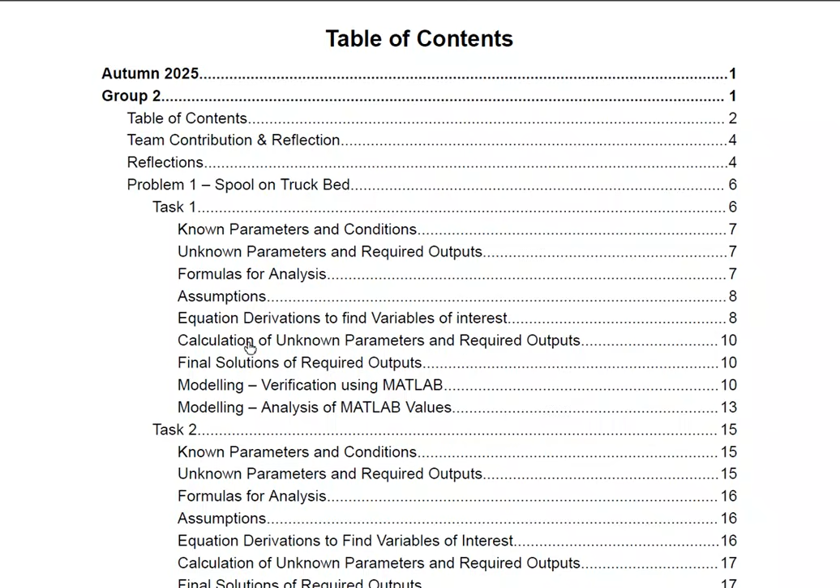We go to the table of contents on the second page. What we have there, and the problem against the page. So we can simply click on that and go to the work. Now, one of the most important things we need to have is on the first page, about the team contribution and the reflection. Who did what? So we can tell that your work is better than your colleague's.

So just saying here that Christina did problem 2 and the MATLAB Virtual Lab 2, while Kaja did problem 1 and the MATLAB Virtual Lab 1. The reflection is about what the student got as an impression from the project. I like what they've done here. They put as sections the achievements from the project, what worked, what didn't work, what you would change if given another opportunity to do the task.

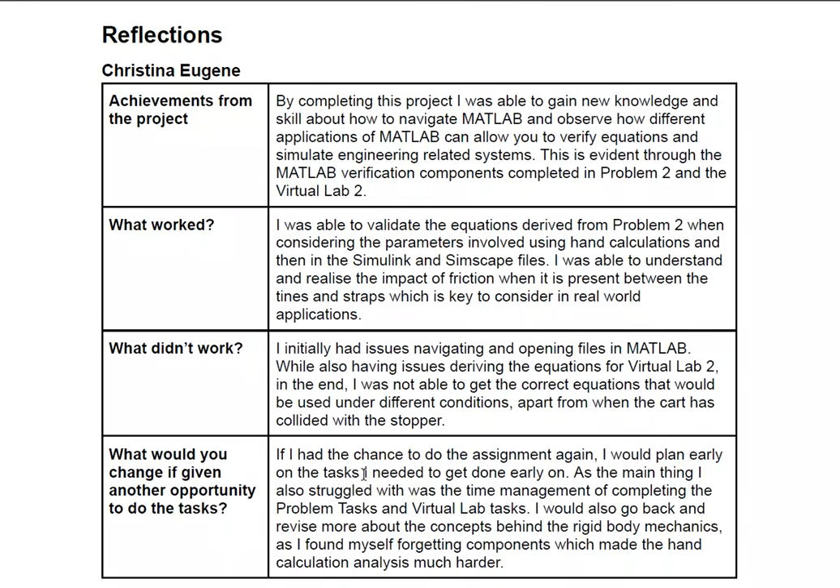Okay, so, wait a second. Forgetting some components, which made the hand calculation analysis much harder. Well, yeah, we explained that. So if you just watch the video, you'll understand what we need from you. Kaja did the same thing here for his reflection, or the impression of the project.

Now we go to the first section, which is about problem number 1, the same thing that we had this year. It's about the spool on the truck bed. You know that you will need to explain to the reader what you're intending to do here, what the reader is going to go through. You will find in the second example we have today that the student just wrote down something like 3 lines describing the problem. It's not acceptable. You need to do something professional.

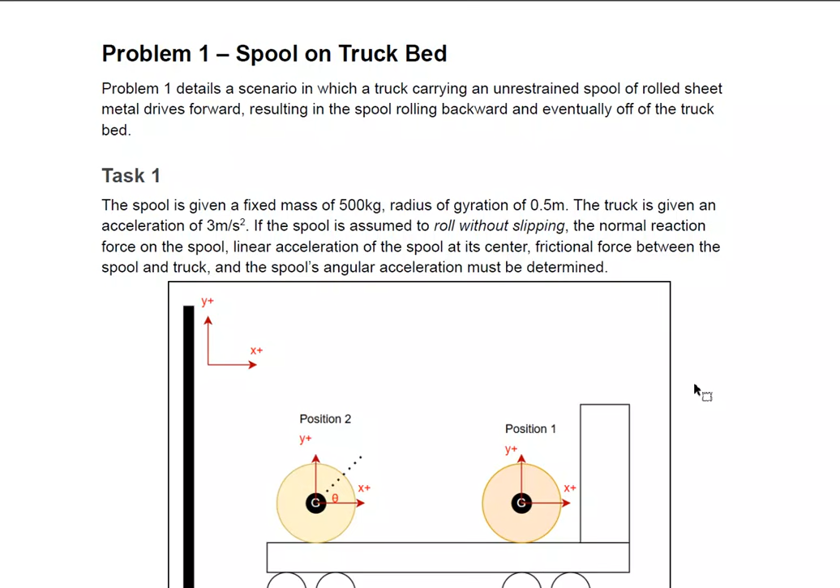So here, I think it was Kaja. He explained what the problem is. 500 kilograms for the mass, the radius of gyration given. The truck has an acceleration. The spool is assumed to roll without slipping in the first scenario. Normal reaction forces on the spool, linear acceleration of the spool at its center, frictional force between the spool and the truck, and the spool's angular acceleration must be determined. So he explained what we have been given and what we need to get.

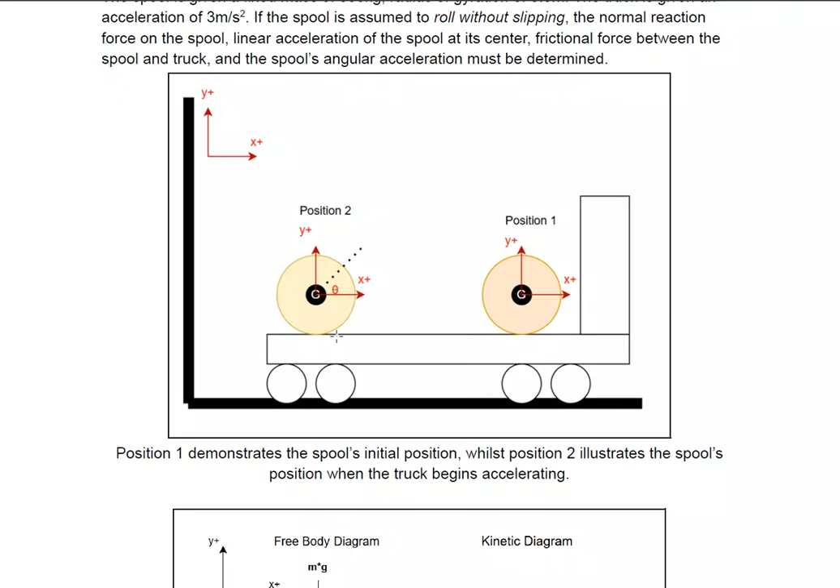I like that because he did the sketch by himself. I have a video somewhere on how to sketch using Excel. Maybe I'll repeat that for you by tomorrow, make a short video on how to sketch using Excel and how to take that to the Word document. So you can see that he sketched that by himself. It's much better than taking a snapshot and putting it in your work. More effort means you deserve more points.

Okay, so that's a free body diagram and the kinetic diagram for this scenario, and we did that in the examples, as you remember. Okay, the known parameters and the conditions have all been displayed as a table: the mass of the spool, the radius of gyration for the spool, the truck acceleration. These are something you can change, so that's what we call parameters. That will be your input, and according to that, you will get some output.

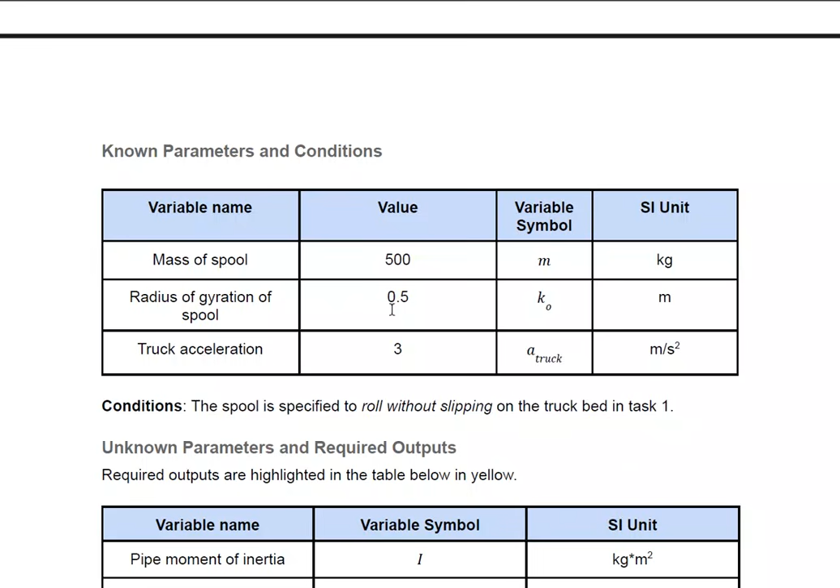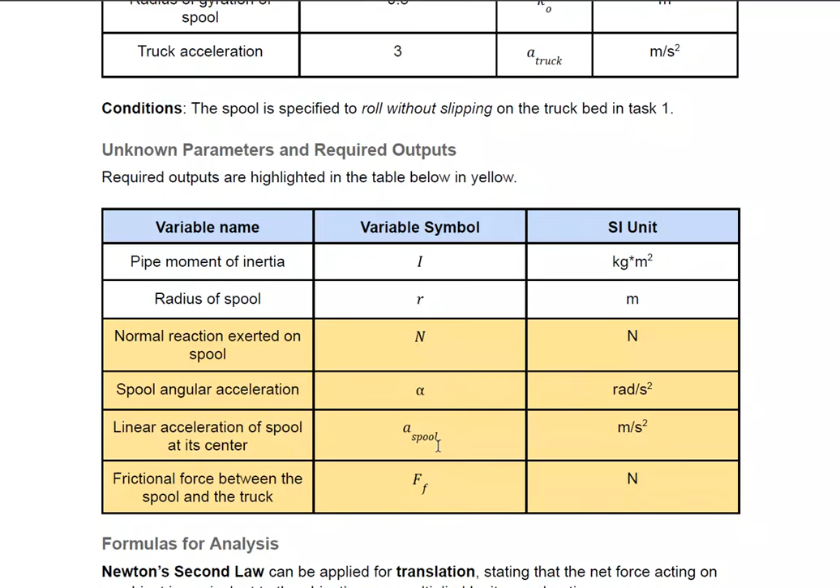The variables we are going to have are also listed. These are the unknown parameters and the required outputs. The variable named mass moment of inertia, because this will be calculated using both the mass and the radius of gyration, so this will be something to be calculated. Radius of the spool in meters, the normal reaction exerted on the spool, the normal force, we have the alpha, we have the linear acceleration of the spool at the center, or the AG as we called it earlier, and the frictional force between the spool and the truck.

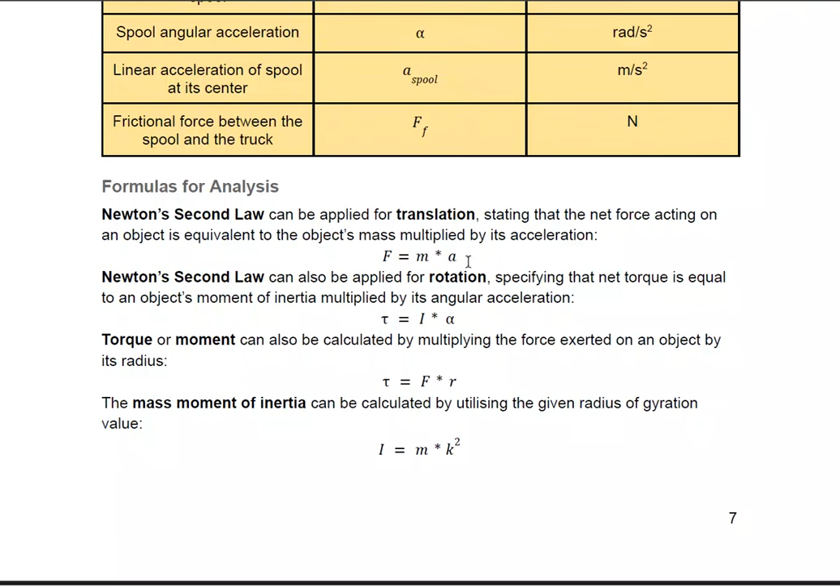So the formulas for analysis, you can get all these formulas from the lecture slide. You can have them from the MATLAB code itself. Just type them. Please don't take a snapshot. Well, it's not that hard to type an equation. It's very easy to type an equation. So please put some effort to do that.

So we come here and put some assumptions for the scenario we have. First, the spool is rolling without slipping in the first scenario. No external forces other than the friction act between the spool and the truck bed at the contact point. The friction is going to be static and sufficient to prevent slipping. The truck has a constant linear acceleration. The spool has a uniform mass distribution, and the acceleration due to gravity is going to be given by 9.81, which is the g value.

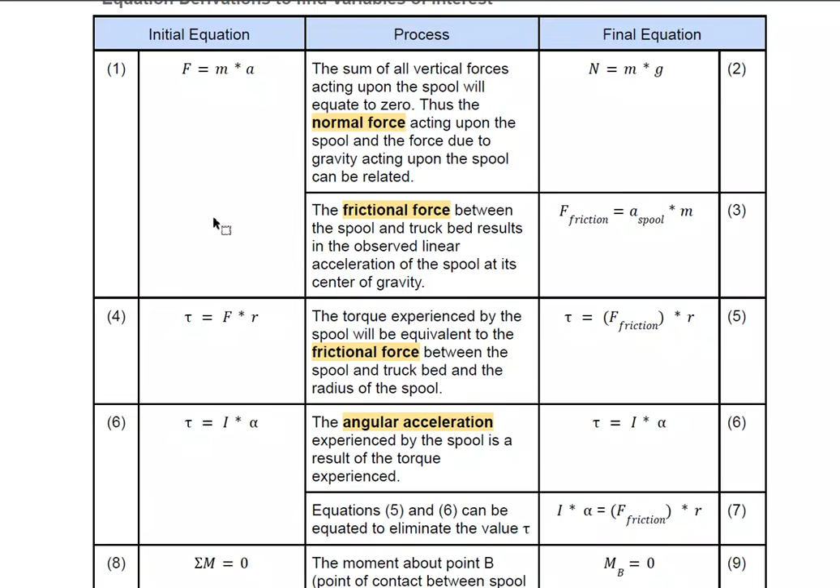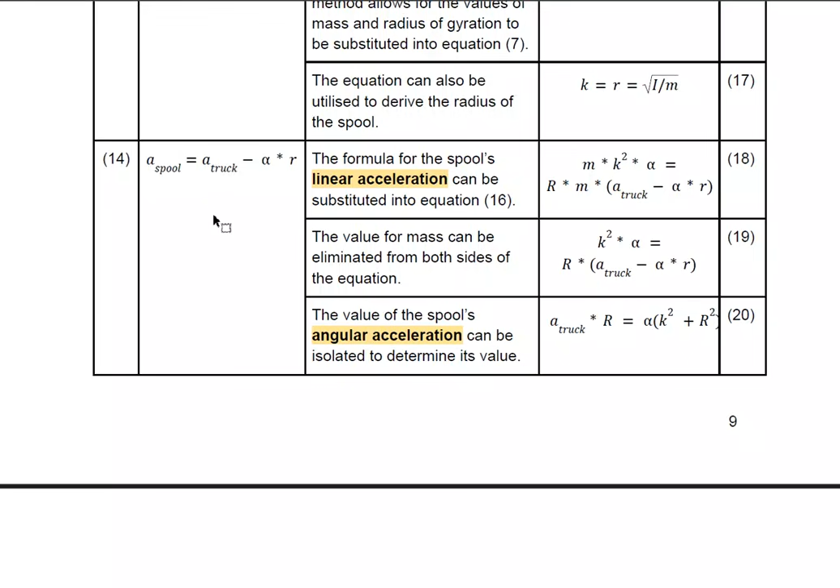The equations for the calculation have been listed. As I told you once again, all these equations are actually coming from the code. Okay, so once again, we did a similar example in the class. We reviewed that for the quiz, so that shouldn't be something new for you. If you would like to know what you are going to add in your report, please watch the video that I have on my playlist.

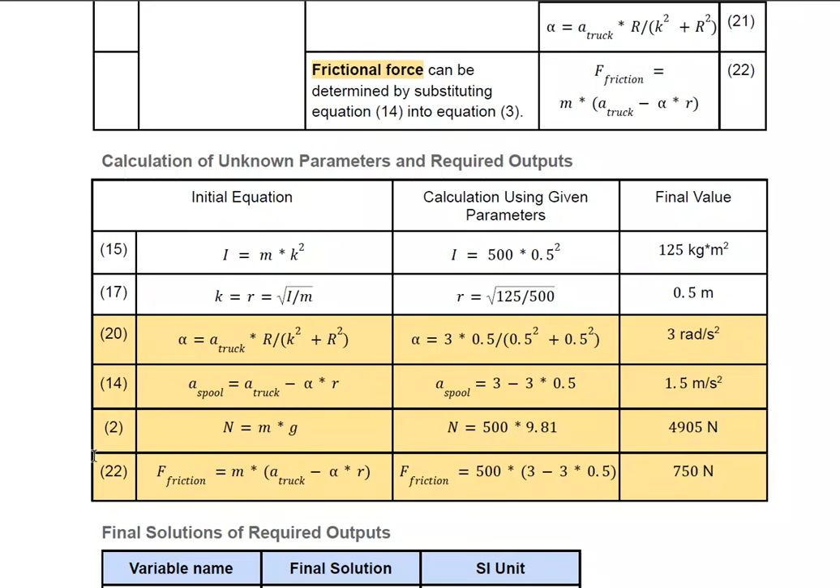The calculation of the unknown parameters and the required outputs: as you know, the I value, the K value, how to be calculated, the alpha, the acceleration of the center of the spool, the normal force, and the friction force. It's a good thing to number the equations, so you can say that this parameter has been calculated using equation number 22.

Okay, the final solution required for the output is going to be the normal reaction exerted on the spool. The normal reaction was 4,905. The spool angular acceleration 3. The linear acceleration of the spool at the center is going to be 1.5 meters per second squared, and the frictional force between the spool and the truck is going to be 750. That has been done by calculation. He put certain values, as you can see here. He decided that the mass is going to be 500, the radius of gyration 0.5, and the acceleration was 3. Then according to that, we calculated the other parameters using the equations given in this list.

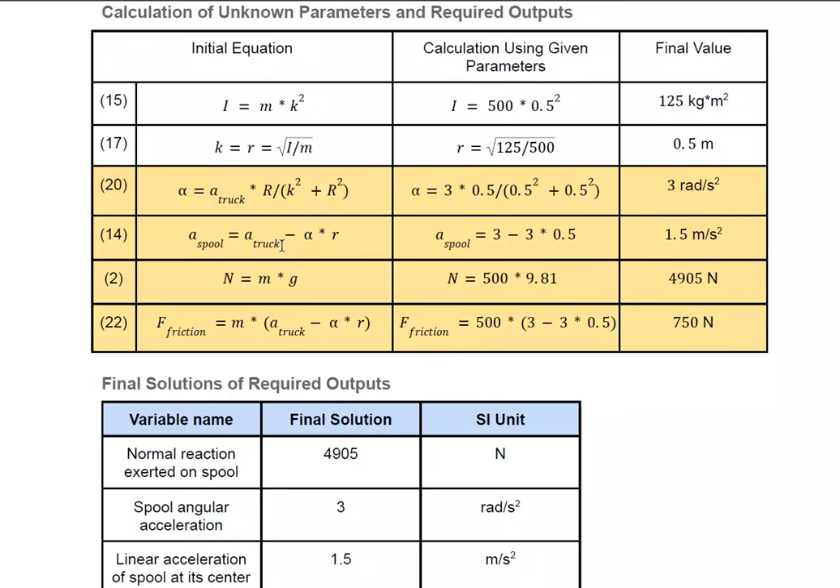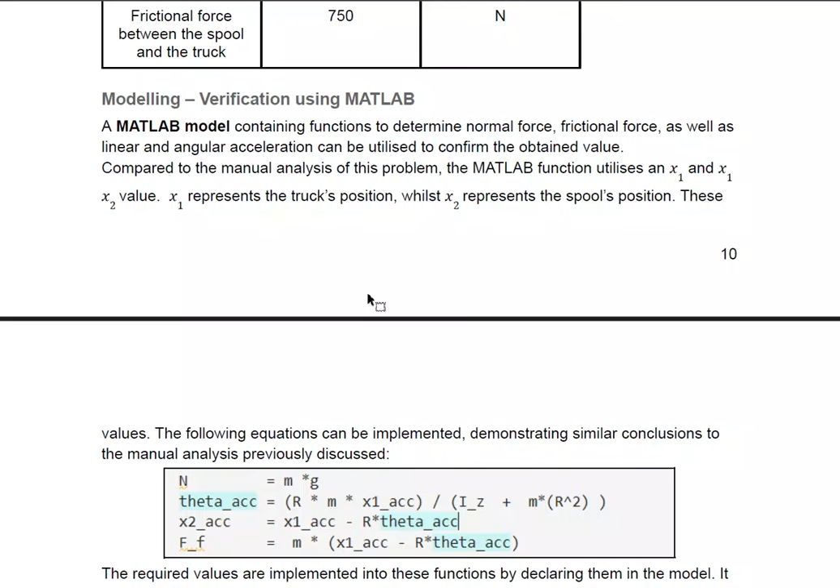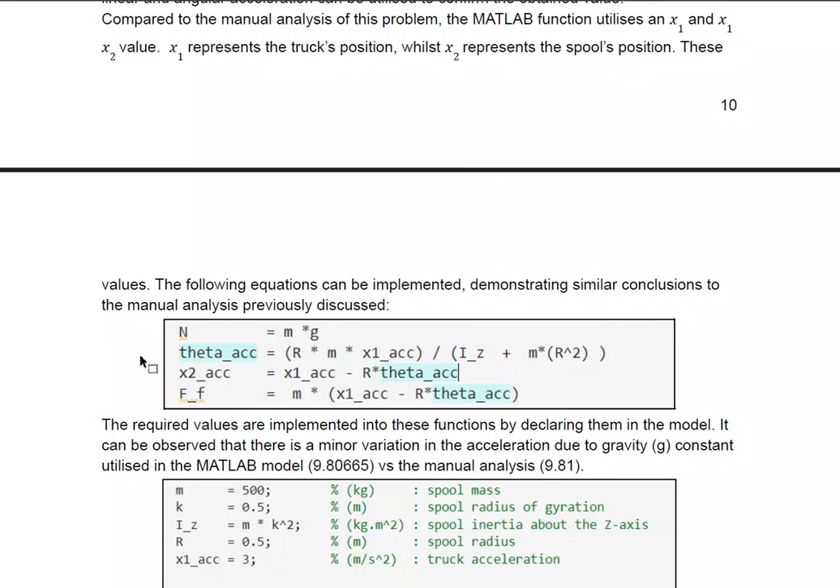Okay, now he's going to use these values to verify the MATLAB is doing the correct calculation. So we run the code. You remember that you have to follow the steps given to you in the start here section, one by one. You have to run every section individually to have the parameters generated for the section after. Don't run the code from the beginning. By doing that, you will end up getting the same values for N, for the friction force, and for the acceleration. That means your code is doing correct work, because you used the hand calculation to verify that the code is working correctly.

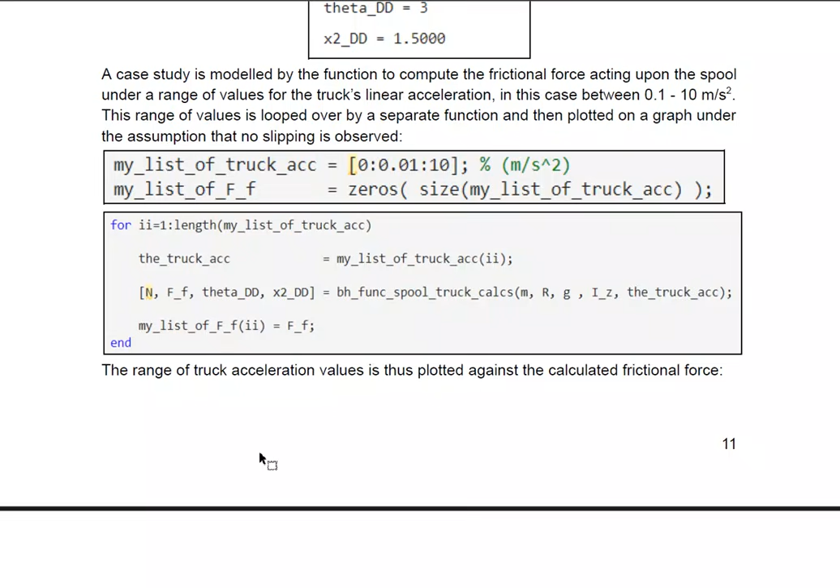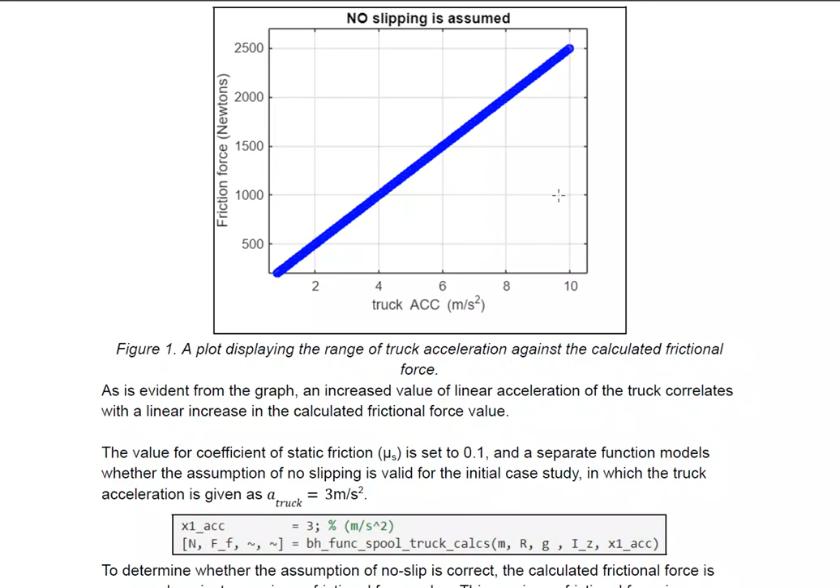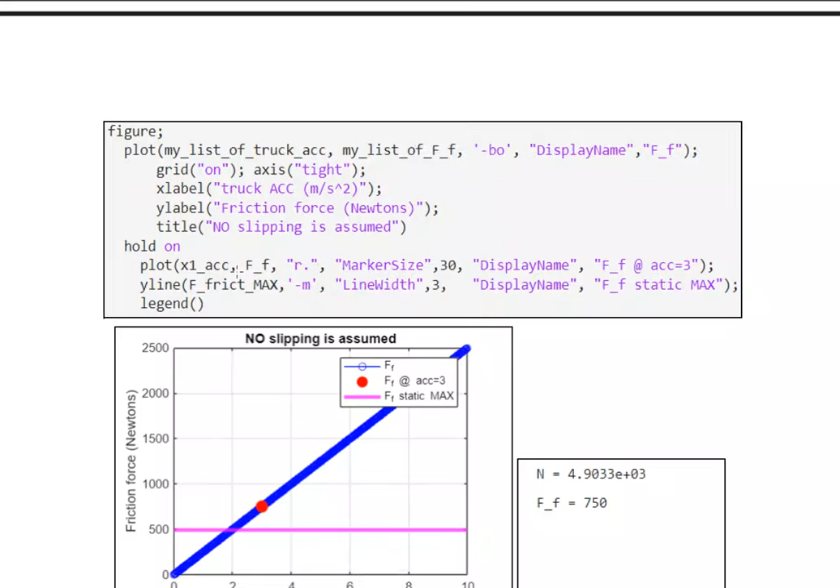Now, after doing that, you can change these values. You can change the inputs and get new values for the normal force, the friction force, the acceleration of the center, and the alpha value, because now you know that the code is working correctly. So watch the video, you will understand what we mean by these graphs and by every output we have here. That was the presentation for the sections, how to plot the figures, the meaning of the figures, what output we are going to get from each figure, and so on. Okay.

From my point of view, I think that many people will say, okay, now he just got that from the code. Yep, but he presented it in a very easy way that makes the reader read it and follow it up in a good manner. So try to do the same thing.

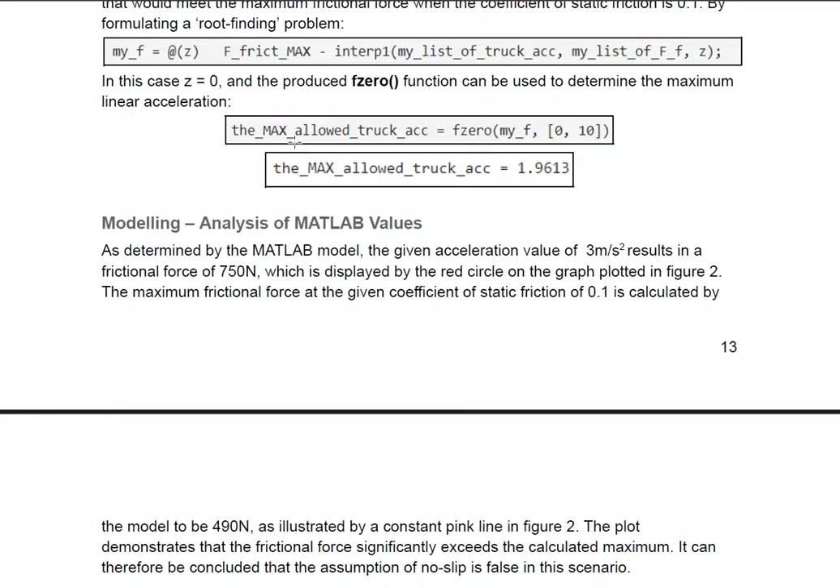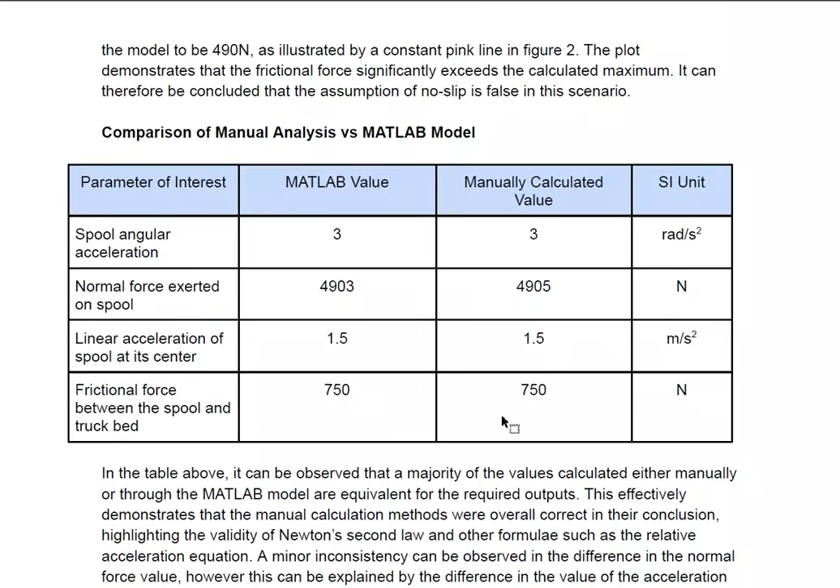Now, modeling analysis of the MATLAB values. He described the MATLAB code first. Now he's going to do the comparison. So for angular acceleration, the MATLAB value is 3, the manual calculation was 3, the same thing with the calculation and the MATLAB value, very small changes, two in thousandths, okay, and the linear acceleration the same, and the frictional force was the same. So just a very brief discussion about what we have between both, and this should be okay.

That was one thing, but I think that he missed something to be done after that. We are going to start with the same parameters. We can change the mass, we can change the acceleration, we can change the radius of gyration. So do that and get multiple results. Let's say, for example, get 3 or 4 sets and make a comparison between them. Okay, you need to add that here.

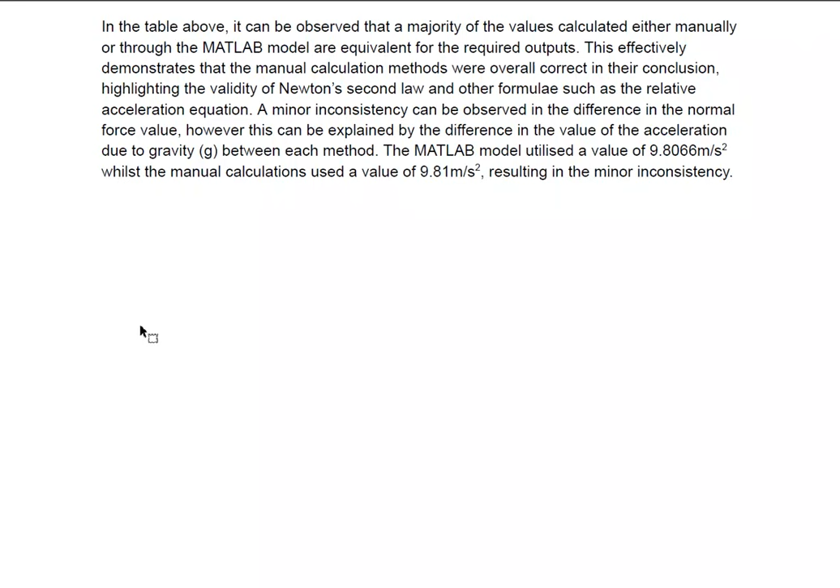So once again, I wasn't the person who marked this one. If I got to mark this one, I think for this section, out of 20, this student deserves about 15. Okay, it's not 18 or 19, it's 15 for what he's done, because he missed the most important thing. If I have a code, I need to use that code to get multiple iterations. No iteration has been done here. Just remember that. No iterations have been done here.

Now we're going to task number 2, where we're going to have the slipping. So, well, actually, not the MATLAB itself, the Simulink will tell you whether you have slipping or no slipping. If you check the video, you will find that the Simulink code has a circle that turns red if there is slipping, green if there is no slipping. That means you need to change your parameters to check in what situation, between a mass of 50 to 500, radius of gyration between 0.1 to 0.5, and truck acceleration between 0.5 to 20, slipping will occur. Not only changing the coefficient of friction.

Usually what we do is fix most of the parameters and change one of them. So I can change the mass. Of course, the mass will be related to the coefficient of friction. So you can change the acceleration. You said that at 0.5 acceleration, there will be no slipping. If I increase the acceleration to 10, there will be slipping.

Then in between them, you're going to have something like another 4 values, and see whether at 2 there will be slipping or no slipping. At 4 or 5 there will be no slipping. At 7.5 we're going to have slipping. So just go back a little bit to 6.8, for example, and see if there is slipping or not. Then you will say that the critical acceleration is going to be this value. That's a good idea, to make the variables change. I'm 100% sure that the student hadn't done that as well.

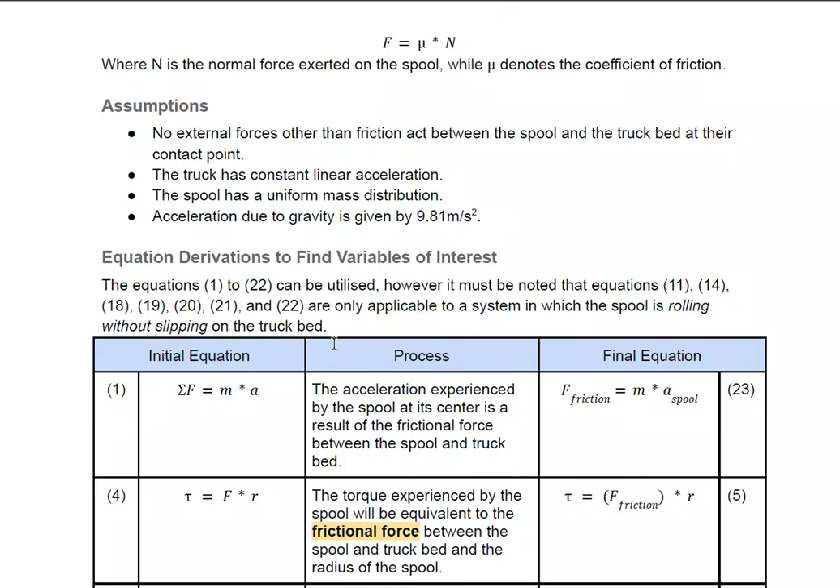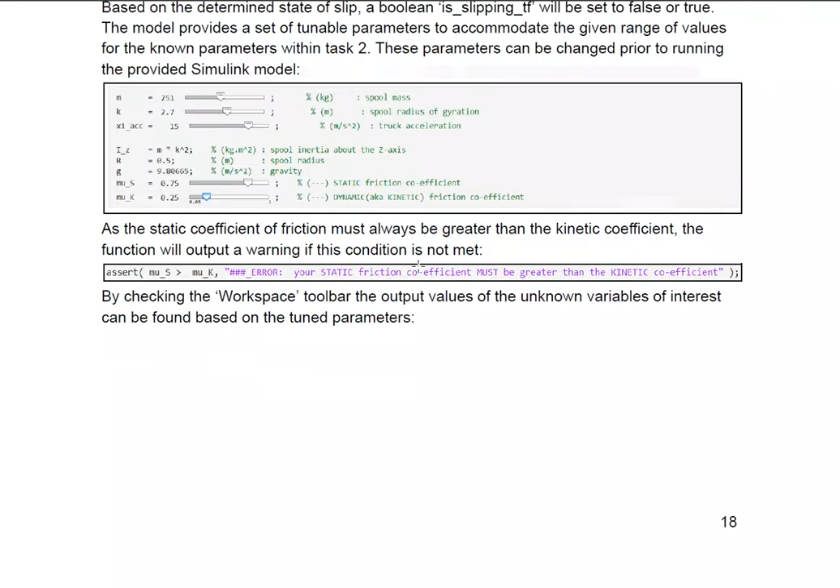So once again, he presented all the equations, which are once again from the code, did the hand calculation for that, and verified the MATLAB code. We can see here that we can slide these sliders. I would like you to watch the video, because I'm not going to explain this one here, to change any of the parameters that we have.

Now, how can you tell that changing the mass won't be enough? Because the mass and the I value, or the moment of inertia, will decide what the K value is. That means you need to calculate the I value for the cylinder, then you will know the radius given to you. Every time you change the mass, you need to change the K value to be compatible with that mass, because these two values are related.

Remember that K is equal to the square root of I divided by the mass. So when the mass changes, the K should be changing. But for the acceleration, if these are constant, and the friction constant is constant, but the acceleration changes, then the situation will be changed. The output will be different.

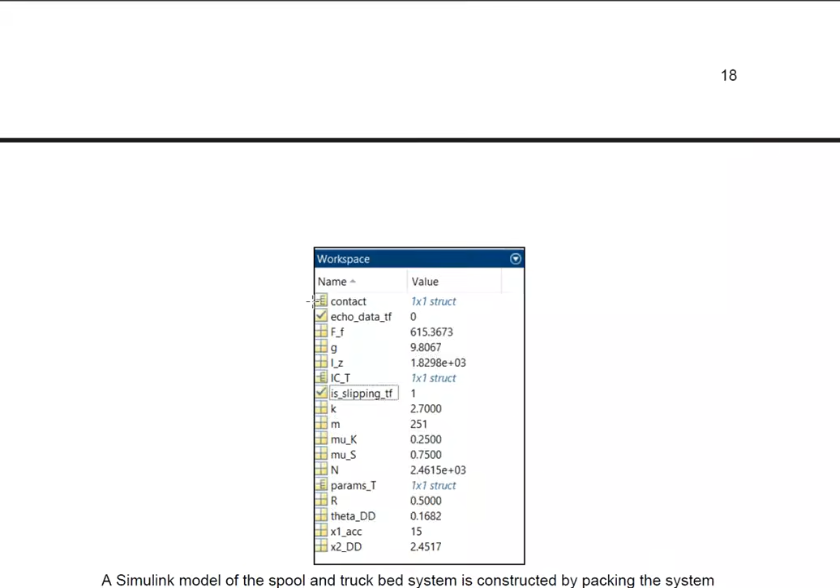Again, follow the steps that will be shown to you, and that's what I'm talking about with this circle. The green one means there is no slipping, the red one means we have slipping. So you can keep changing parameters until the green turns to red, then you play a little bit within the range where it's changed to red.

For example, as I said, at 7.5 meters per second squared, you find it's red. So you drop it down to 7 and see if it changes to green. If yes, then you change it to 7.1, 7.2, 7.3, until you have the change in color to red. Then you will say that the critical acceleration is 7.3, for example.

Okay, that's the description of the Simulink code. These are the outputs. Well, this is not fully shown. If you have this graph, you will find somewhere at the top, like four arrows going to the different corners. So you click on this one, and this will maximize the view of the graphs.

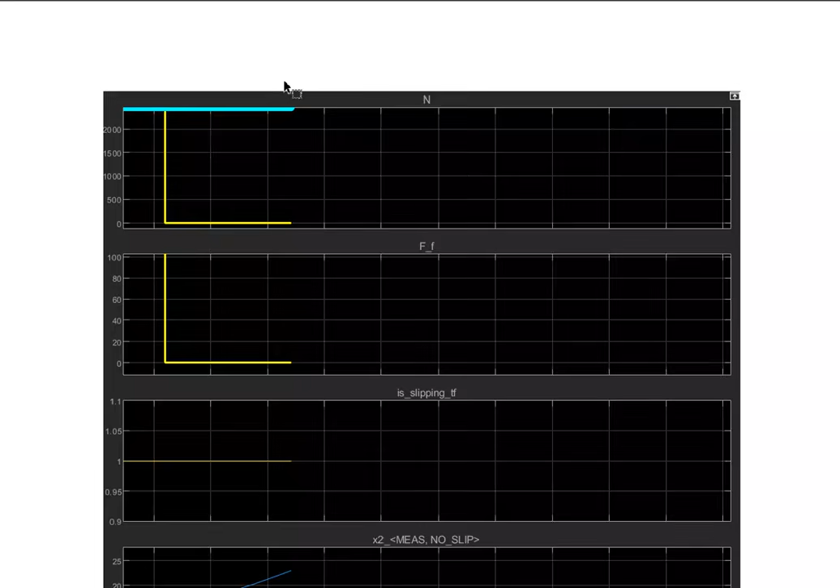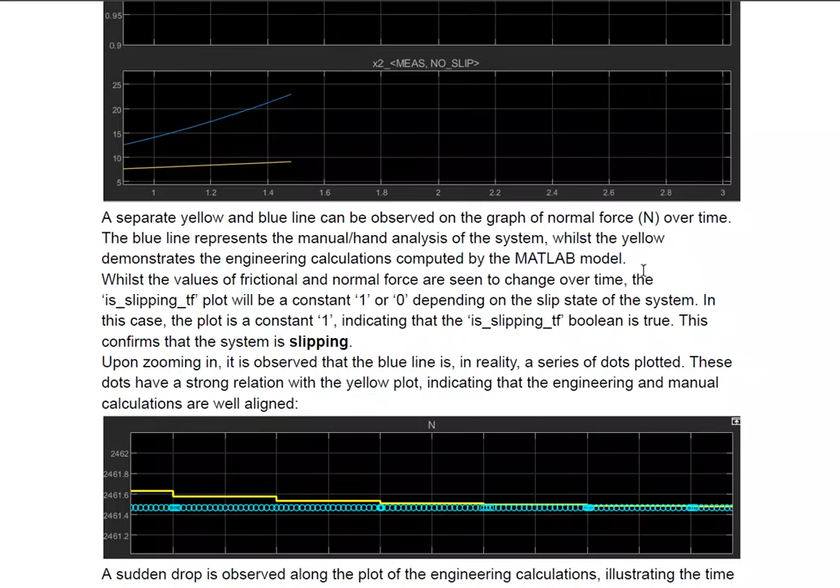Do that before you put the graph in your report. You can see that it describes the output of these reports, what's happening here, what is yellow, what is the blue, and the difference between them. It's all mentioned here, and also mentioned in the MATLAB itself.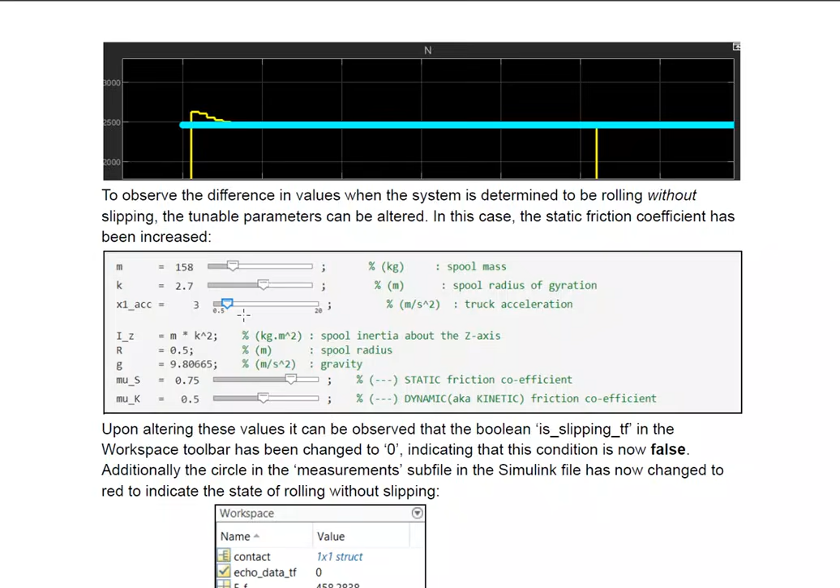I think changing the acceleration is the correct thing to be done. No wait, he changed the mass and he changed the K value. That's logical, because the mass reduced, so the K value should be increasing. Yeah, that should be the correct thing. So he keeps changing that until the red light appears.

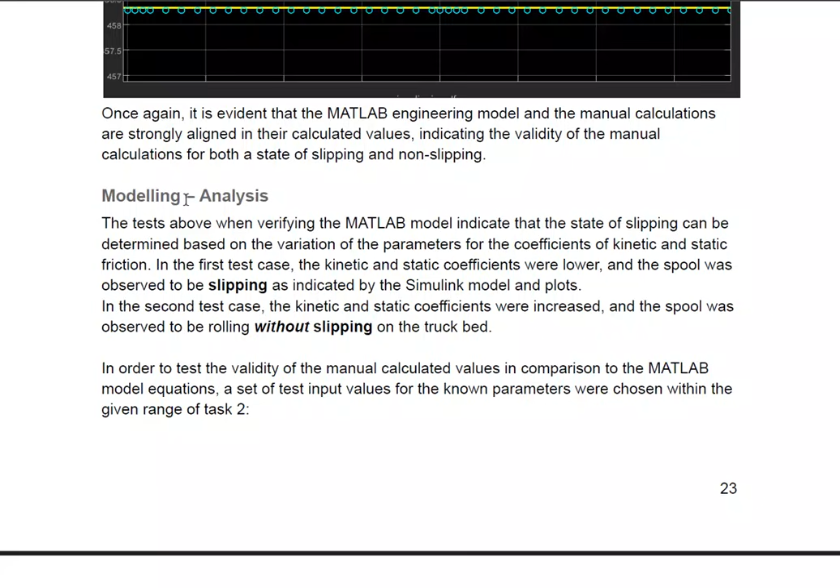I think he explained that he changed these parameters to find what will be the critical value for the acceleration or any of the parameters. Write down an analysis for that. Okay, and done. So you can see here that the range for task number 2 has been done.

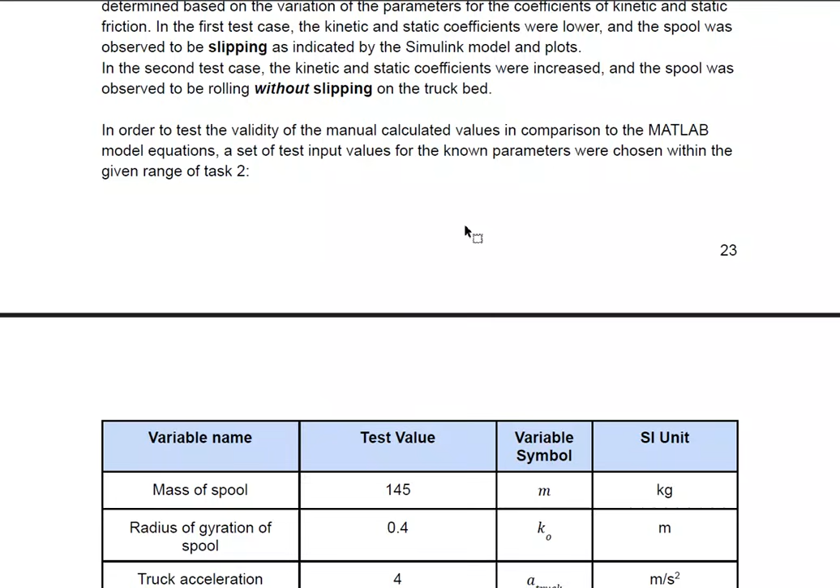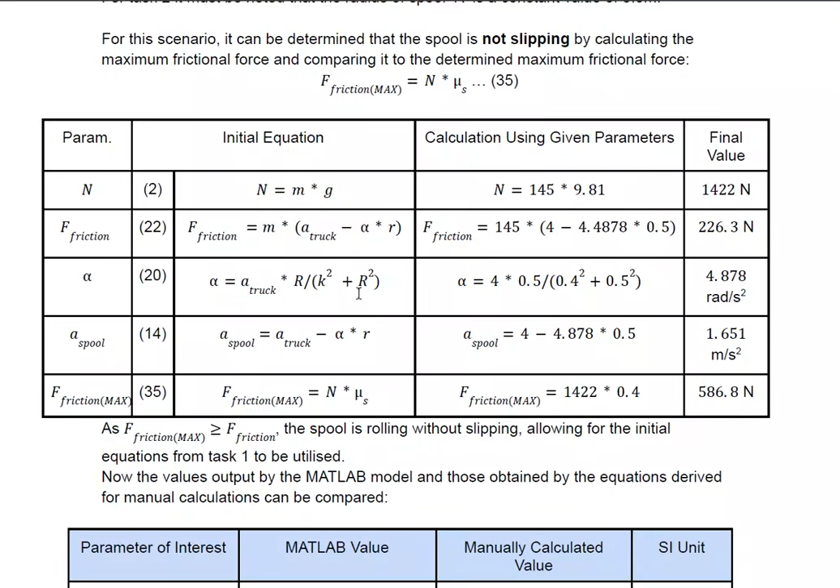In order to test the validity of the manual calculation values compared to the MATLAB model equation, a set of test input values for the known parameters were chosen within the given range of task number 2. So he chooses these values, runs the calculator, and compares between the manual calculation and the MATLAB output, which seems to be compatible as far as I see here.

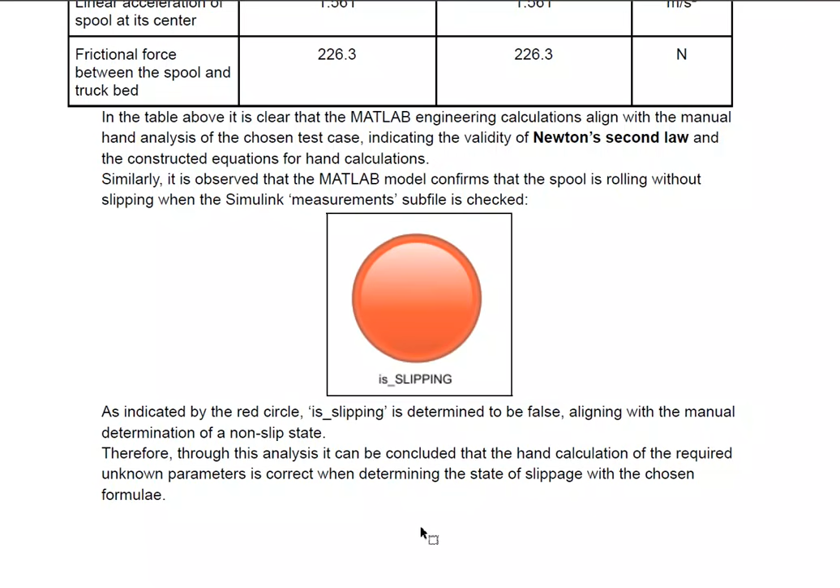In the table above, it's clear that the MATLAB engineering calculation aligns with the manual hand analysis of the chosen test case, indicating the validity of Newton's second law and the constructed equation for the hand calculation. So he said the MATLAB model confirmed this spool is rolling without slipping when the Simulink measurement subfile is checked. The red indicates slipping, shown by the red circle. As slipping is determined to be false, this aligns with the manual determination of the non-slip state. Okay, so he gave the reason according to his understanding.

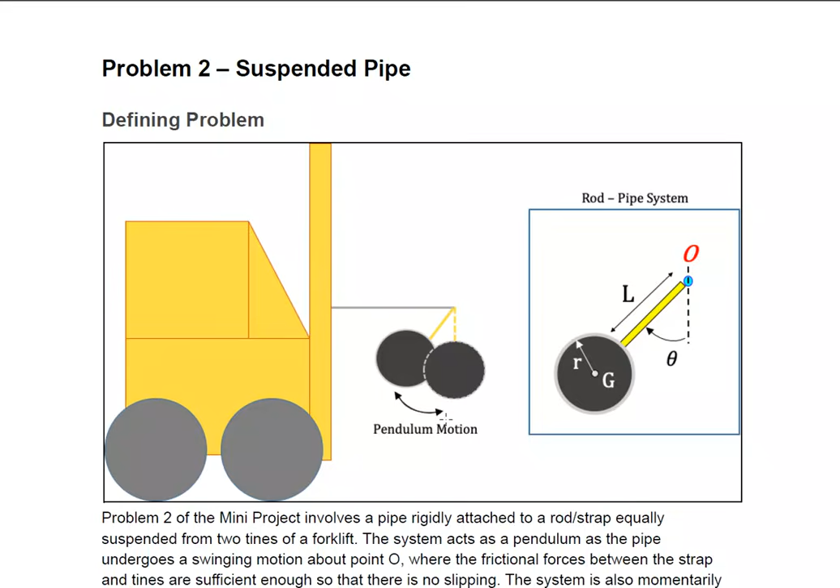Now we're going to problem number 2. I think I'll only get to cover that for today. You can see that, well, remember this was done by another student. So defining the problem once again with a nice sketch, and given all the parameters that will change, which are theta, L, the mass, of course, and the radius. Remember that we have radius and we have radius of gyration. Please don't mix them up.

If you pass, you should know the difference between the radius of gyration and the radius of the cylinder. They are totally different.

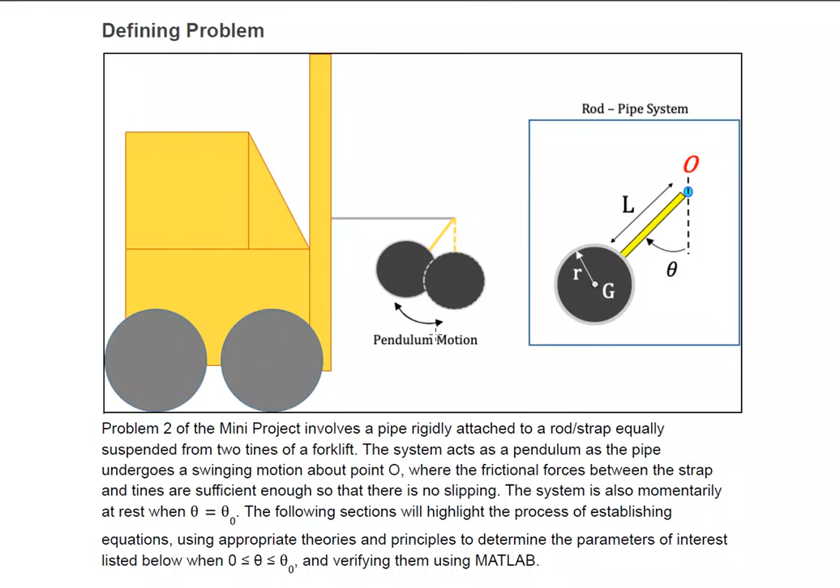So the student described the situation we have here, okay, and what we are going to do, what the parameters of interest we have on this scenario, has already been listed.

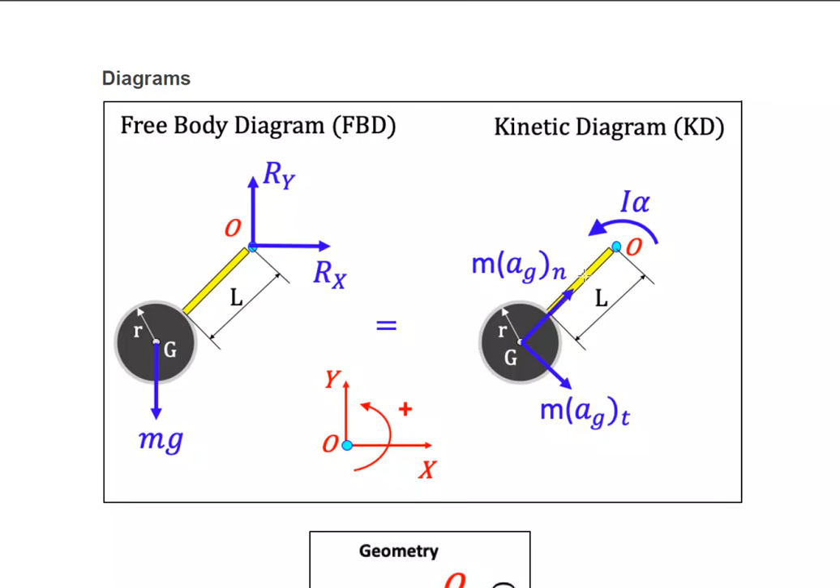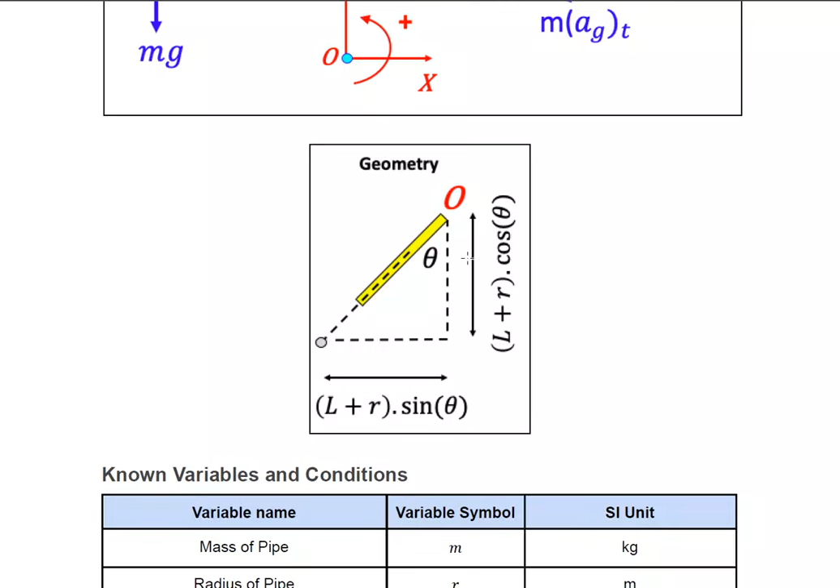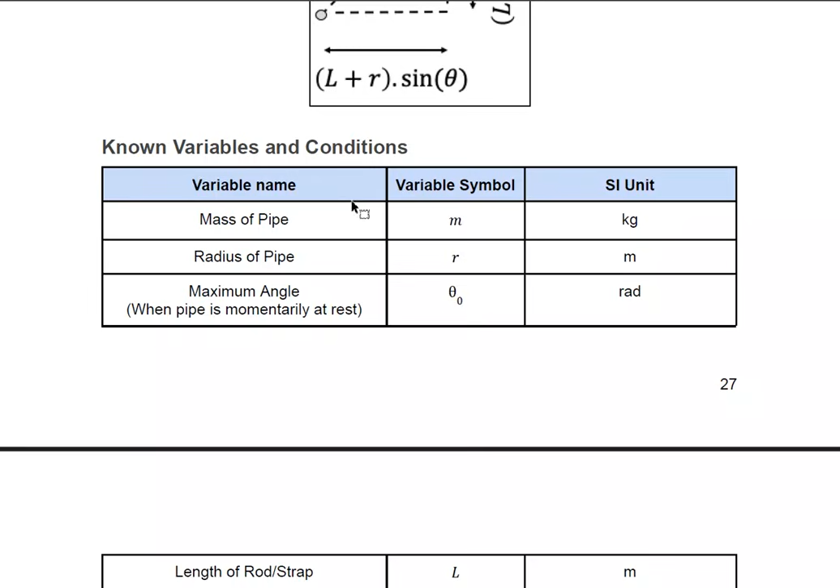That's very good. The free body diagram and the kinetic diagram for both situations have been sketched, and the geometry, the theta, will tell us what the height will be, the x direction and the y direction for the displacement, by simply analyzing the triangle knowing the value of theta. The known variables and conditions have been listed in a table with the units, which is very good. Just don't forget that.

The boundary condition of the angle, where the angle in which the pendulum is going to swing forward and backward, is going to be constrained between 0 and an appropriate value to be changed.

The unknown variables and variables of interest for us, which are going to be calculated later, are the horizontal reaction force of the rod, and the Ry value, which is the vertical reaction force of the rod, and then we're going to have the mass moment of inertia of the pipe, which is going to be the I.

The variable of interest that we have is the normal force for each tine, the required frictional force between the rod straps and each time with no slipping, the angular velocity of the pipe or omega, the angular acceleration alpha, and the maximum tension force in the strap, T maximum.

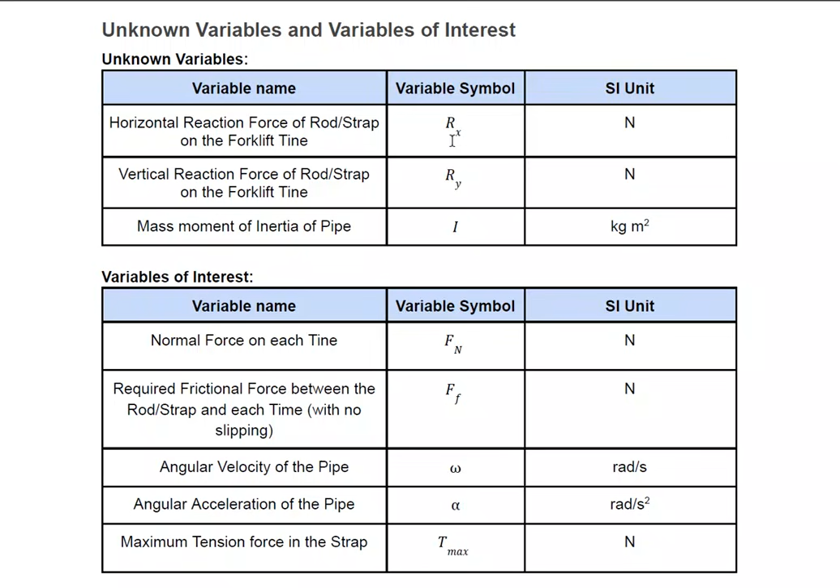So the T actually is going to be found by finding the reactions, because the reaction on the cable, the X and the Y, the value of its resultant is going to be the tension in the cable.

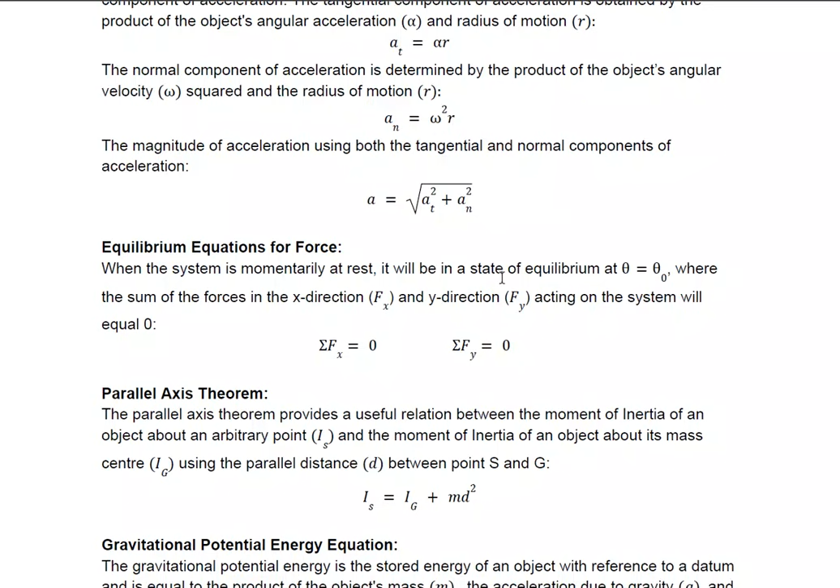Okay, so the equation also has been listed, which once again can be found in the code itself. Just give enough description of each one. Just don't put the equation as foreground without explanation so people will know what you are talking about.

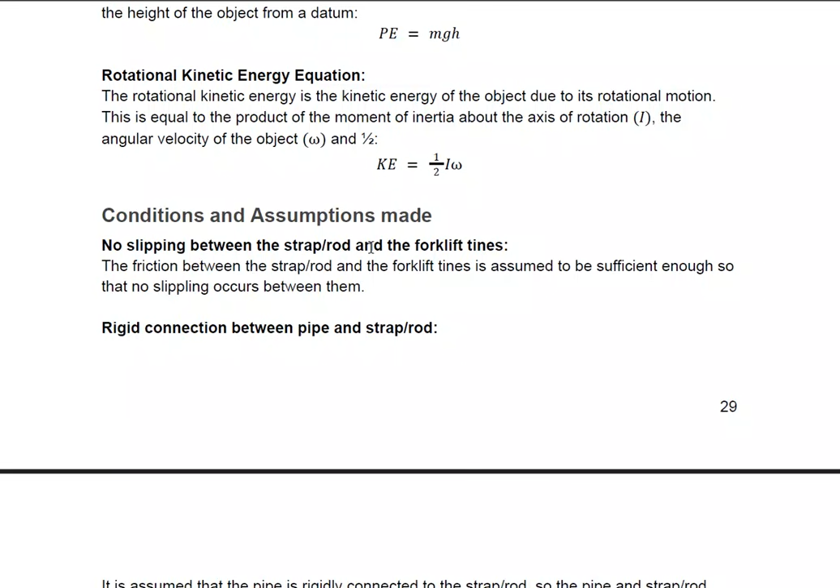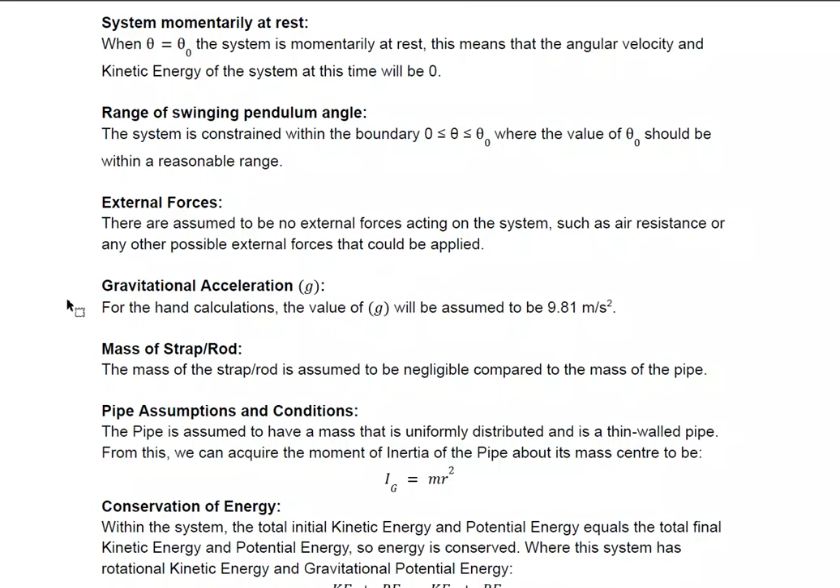The conditions and assumptions made are no slip between the strap and the rod and the forklift tines, rigid connection between the pipe and the strap rod, the system is momentarily at rest are also assumed to have certain values, the range of the swinging pendulum angle, the external forces, the gravitational acceleration, and the mass of the strap or rod has been neglected.

The pipe assumption and condition is to be uniform shape, uniform distributed load, and we are going to consider that it's a thin-walled pipe, so we can calculate its value for the I.

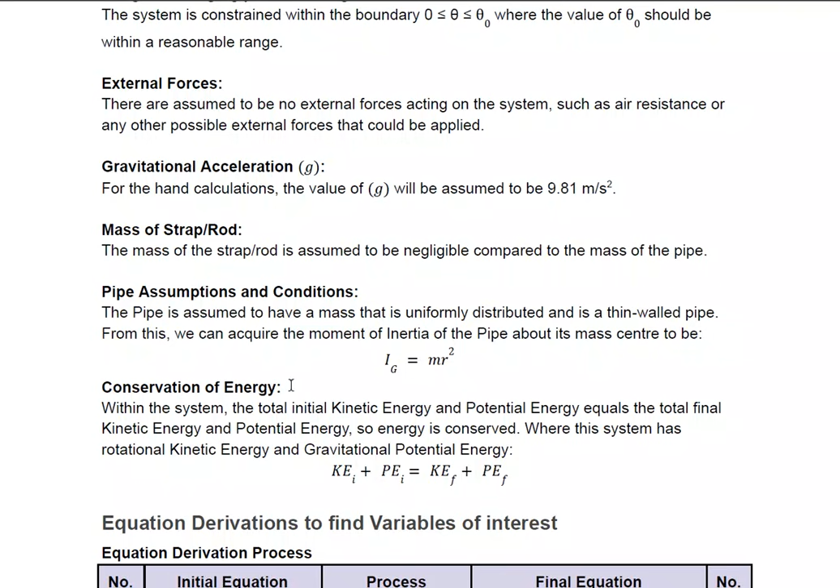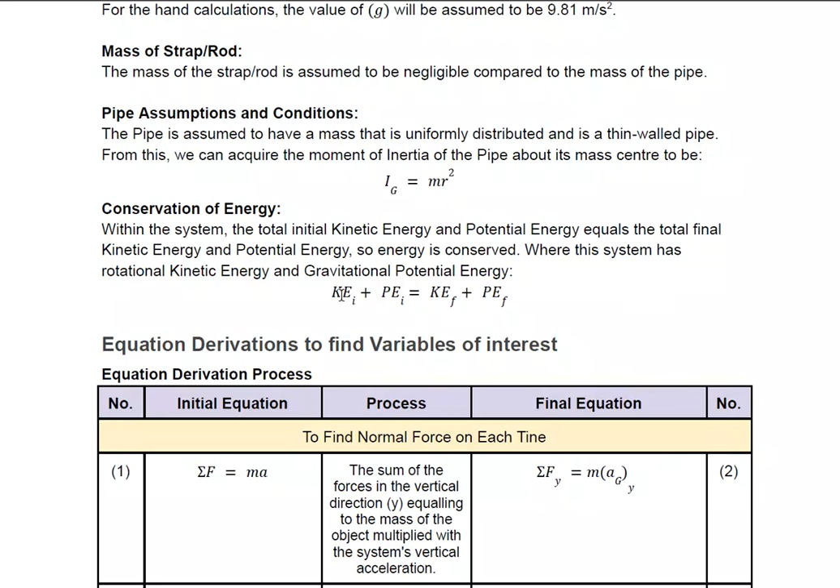The conservation of energy, because we're going to have a change in height for the pipe's mass center of gravity. So the equation we're going to use is kinetic energy plus potential energy for the initial state is going to be equal to that for the final state.

Once again, the list of the equations. And do the hand calculation and compare to the results that you can get from the code.

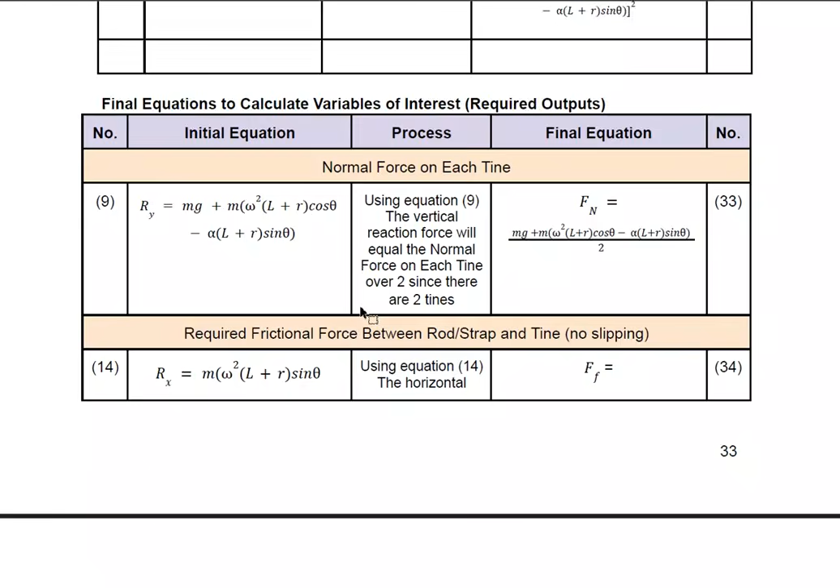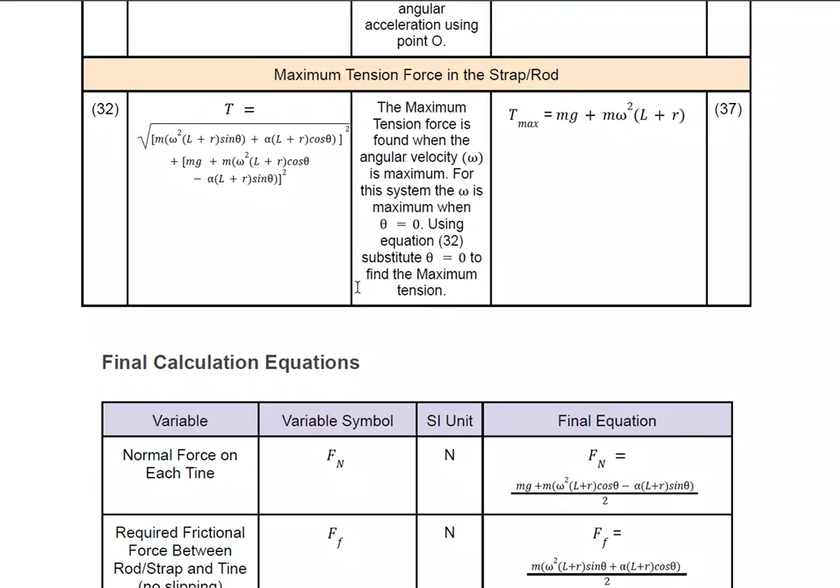Well, that's a very nice presentation, because it's going to be clear. Even if you get all the equations directly from the code, presenting it that way is very good work. That's when you put good effort into presenting your work in a clear manner.

Okay, so the final calculation equation is going to be for, it's not normal friction, this should be the R and the Y. Anyways, it should give you the same answer.

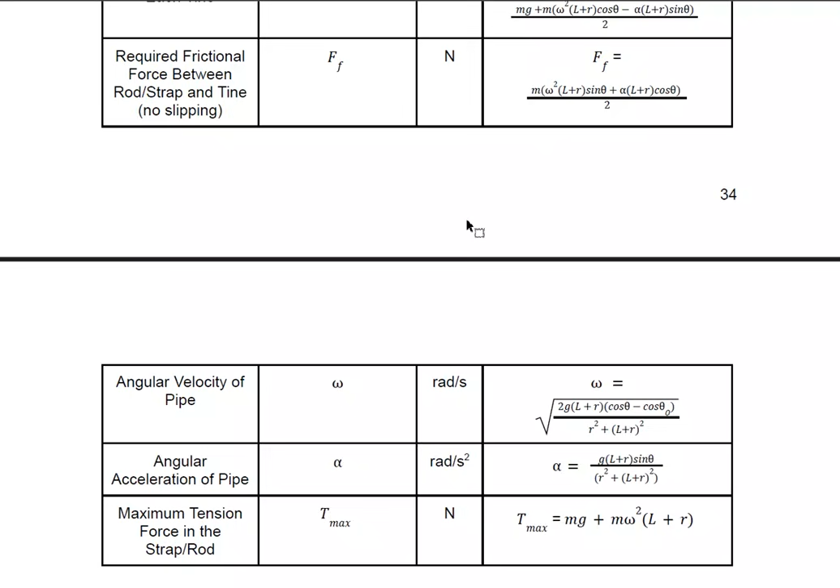The MATLAB verification for the results has been done by both running the simulation and doing the manual calculation, and the answers should be compatible.

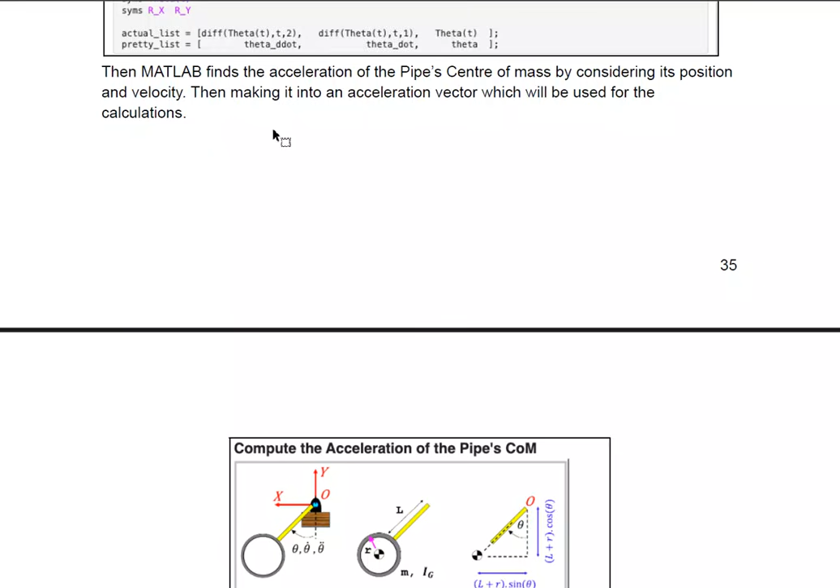So set the parameters, okay, like the mass of the pipe and the value for theta, and then put in the acceleration vectors, which will be used for the calculation. Click on run, and you're going to have the output.

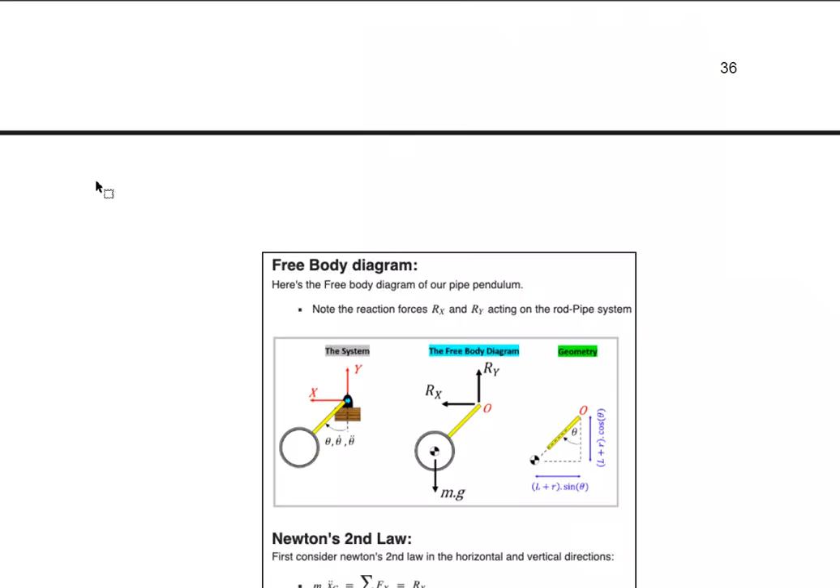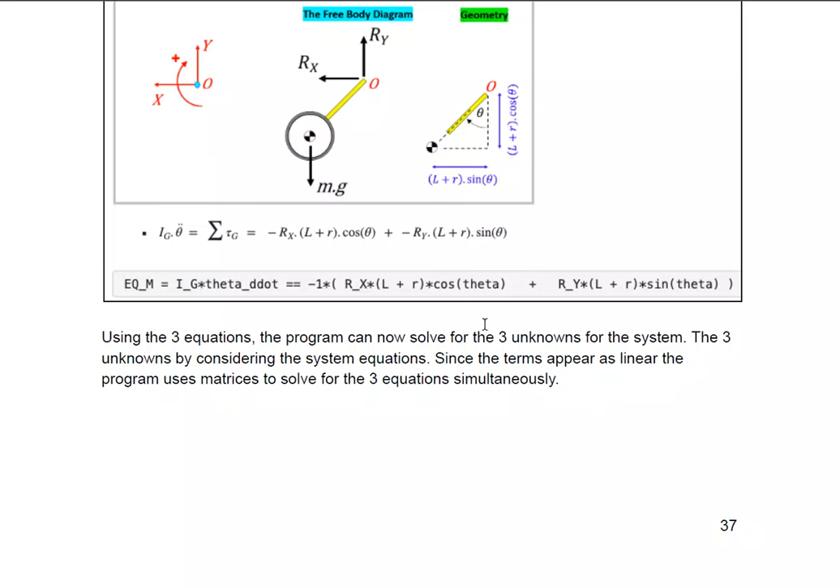Once again, everything here is just a snapshot from the code itself, just still defining the equation and comparing them to the ones that we had already listed above in the tables.

Just remember, you will need to run initially every section of the code individually. Don't run the whole code in one go.

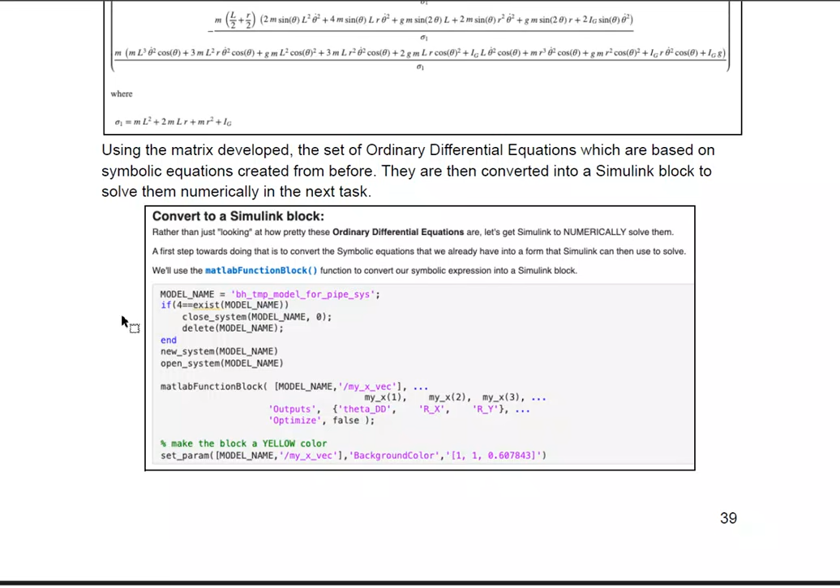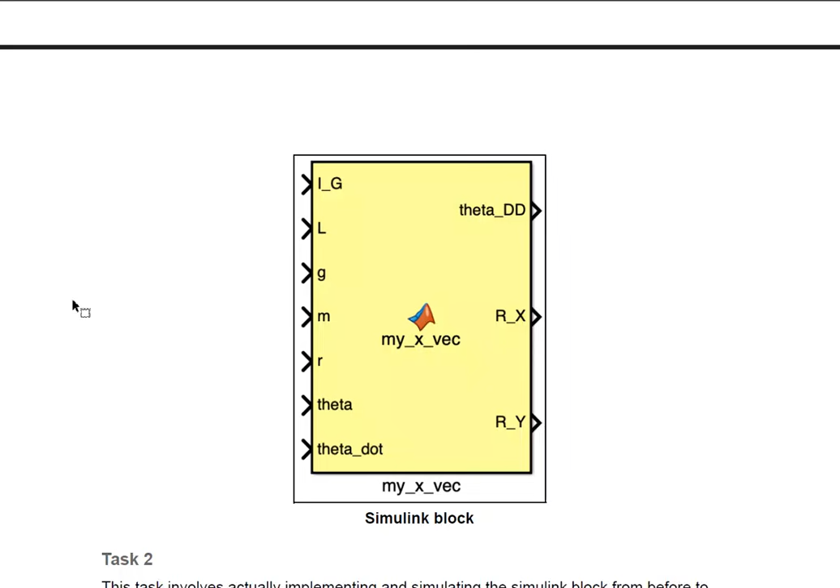Convert to a Simulink block. Instead of just having the MATLAB code itself, it already has been done, but I explained that in the video related to that work. So we have the block, and we're only going to do some connection between the output of the MATLAB and the input of the Simulink code.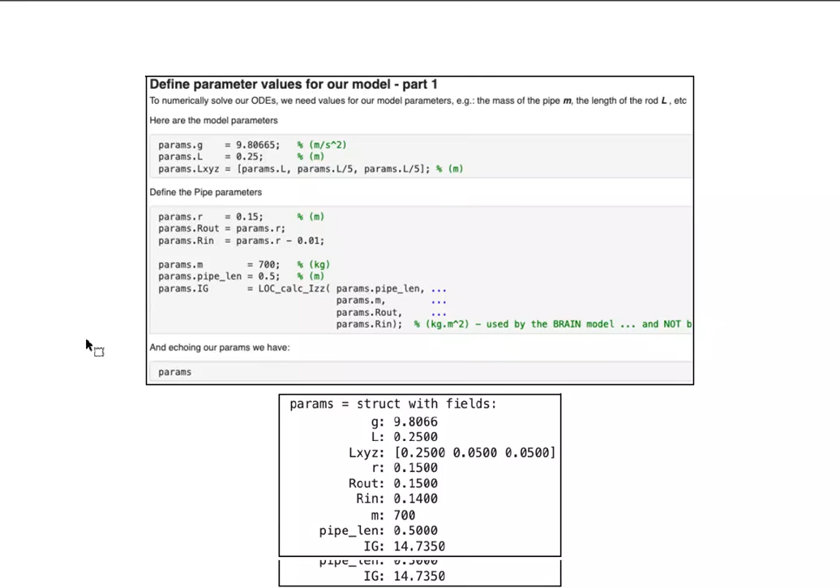Okay, and task number 2 also has been explained here. Same way, define the parameters that we have, like the length of the rod, the mass, the radius, and so on.

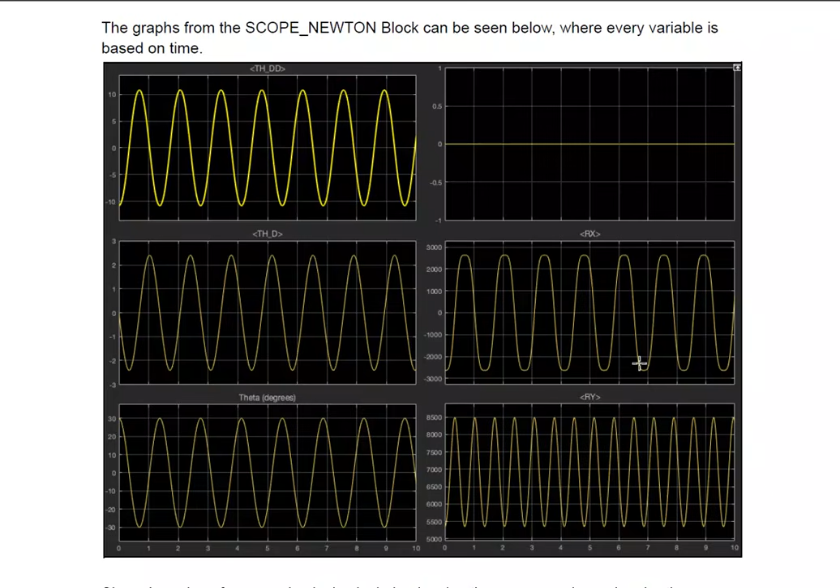Okay, and this will be the reaction in the x direction, and this will be the reaction in the y direction. By the way, 1, 2, 3 are the same. These two are different because one of them is going to be horizontal, the other one is going to be vertical. The resultant of these values should give me the tension in the cable.

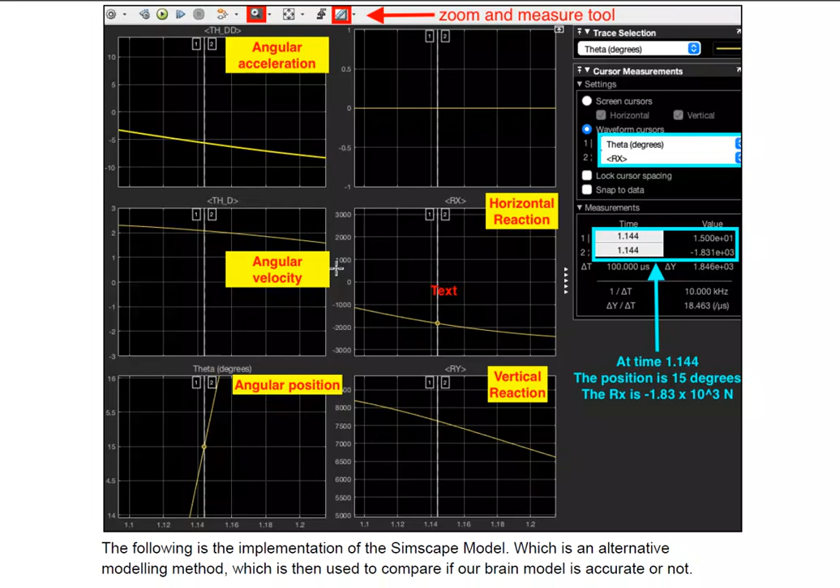Okay, yeah, well they did zoom, and this actually is to expand the thing. Everything has been explained here, and explained also in the PowerPoint if they still have it. I explained that in the video when I went through the code. You can find it in the playlist.

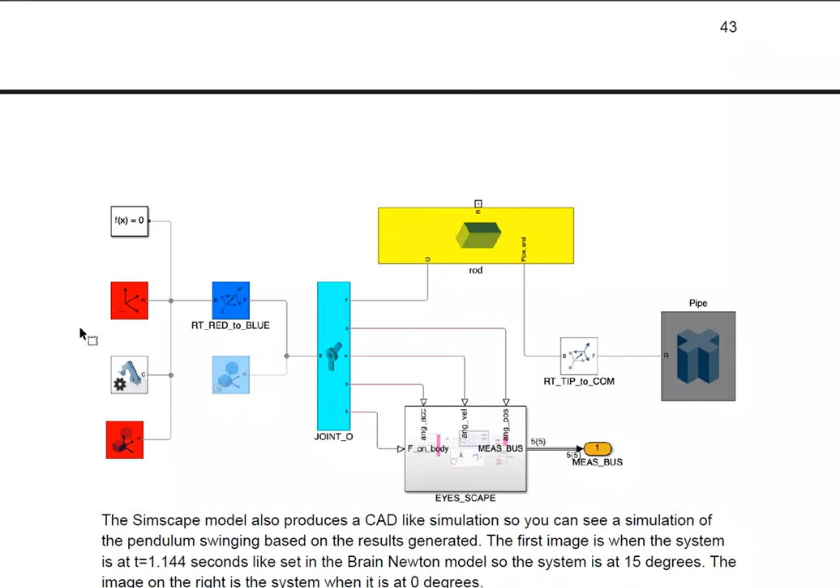Okay, so that's the CAD model. You can take a snapshot for it. You can make a video and upload the video to YouTube, and you can simply put the link.

So you say, for example, to see the video for that, click on that link. So instead of saying here, figure number 1, the swinging of the pipe with the cable, you can put a link here to see the animation of the work. Click on that link and it's going to take us to YouTube, then we can see further animation of the work.

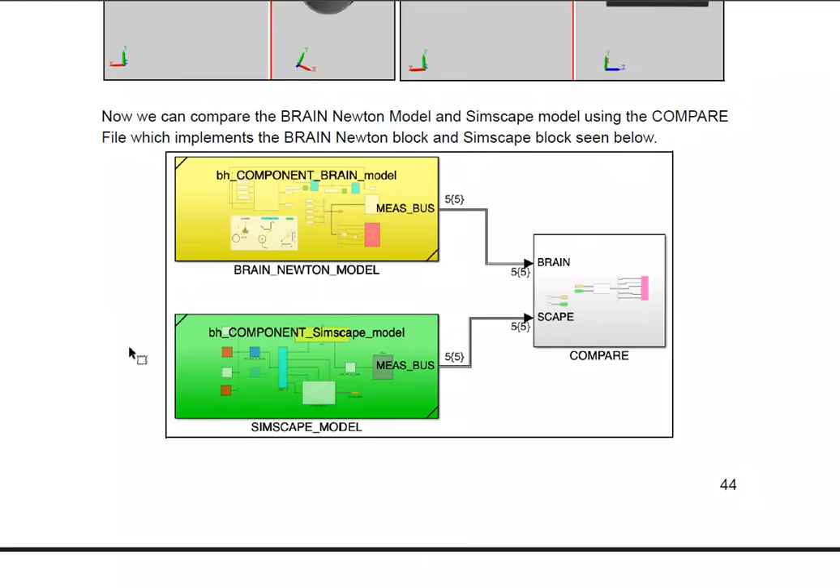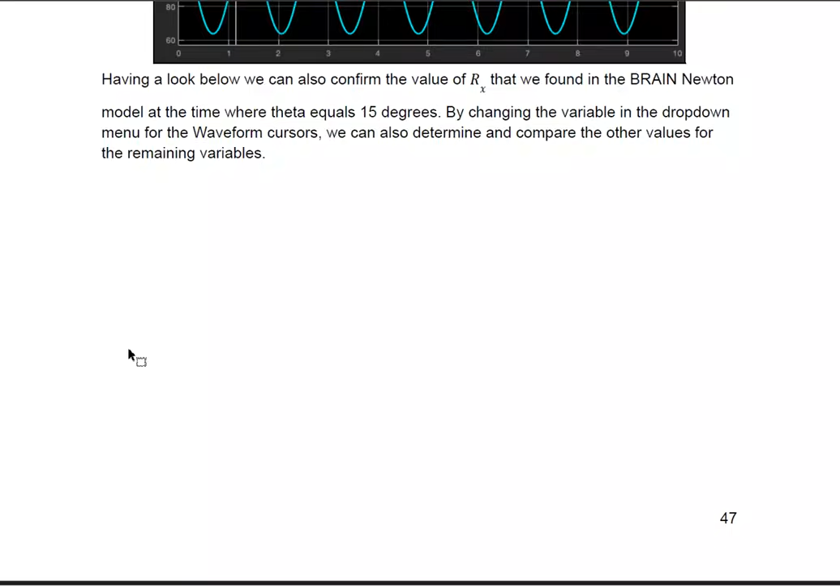Okay, so just keep doing that. Do the brain Newton model and the Simscape model here, and compare files with the implementation of the brain. Just keep describing the results and make a discussion about each. That's it, that's the only thing you need to do. Just keep doing that, changing the parameters, and you will get different answers.

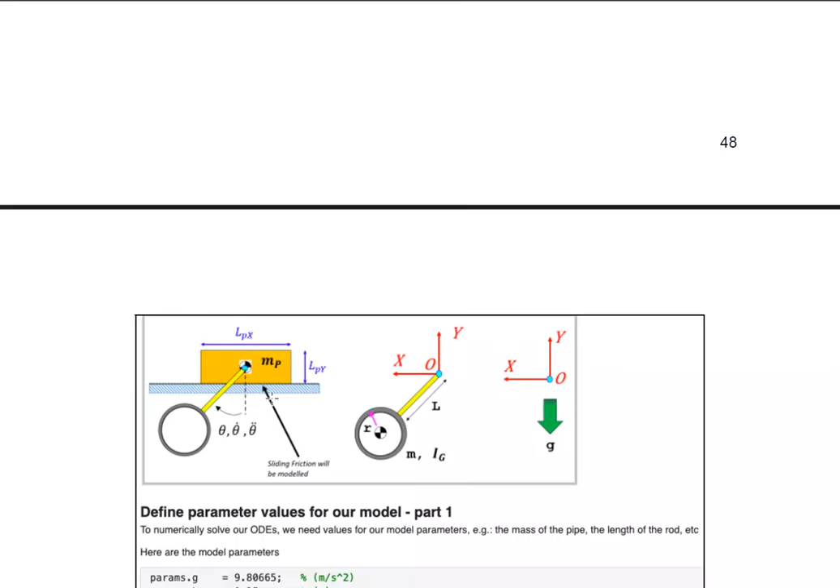Oh, this will be task number 3. Task number 3, we're going to have this block to be slide or no slide. So we're going to have the friction between the block and the surface, as this pendulum is going to be swinging.

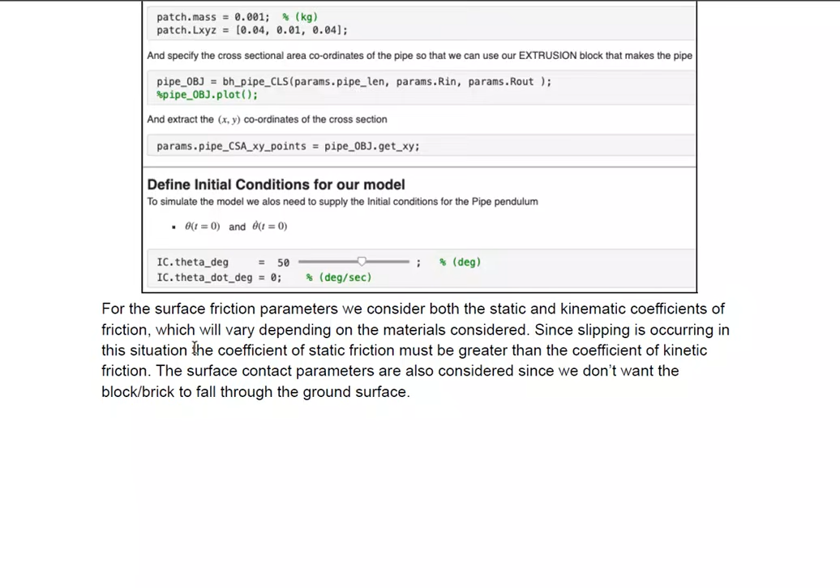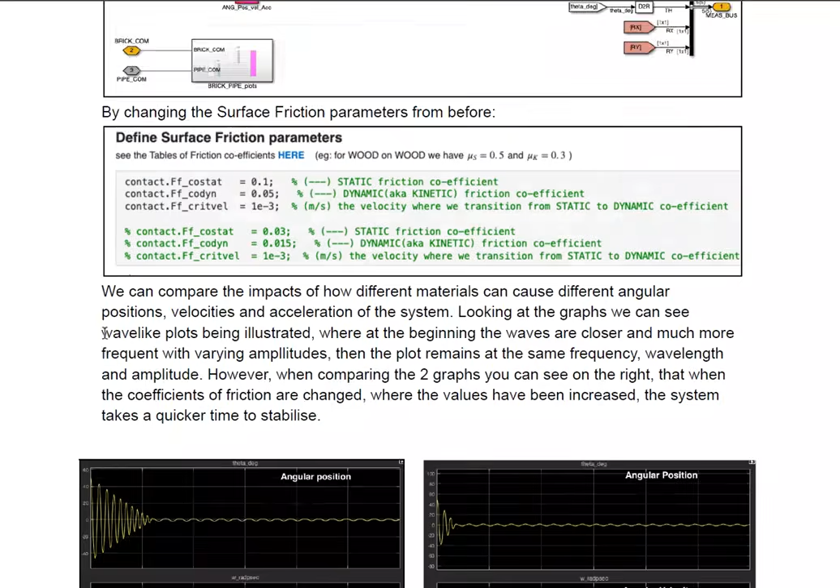Okay, I just want to make this clear, we're not talking about the project now, we're talking about the report.

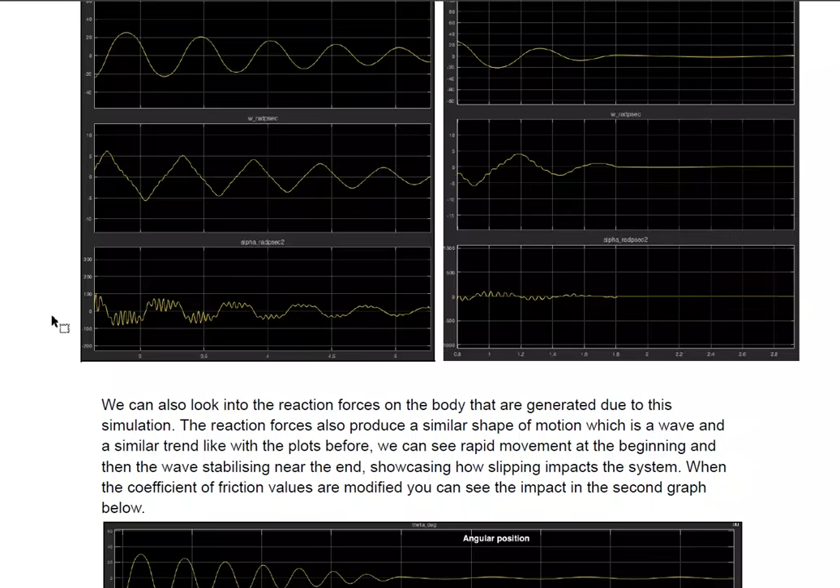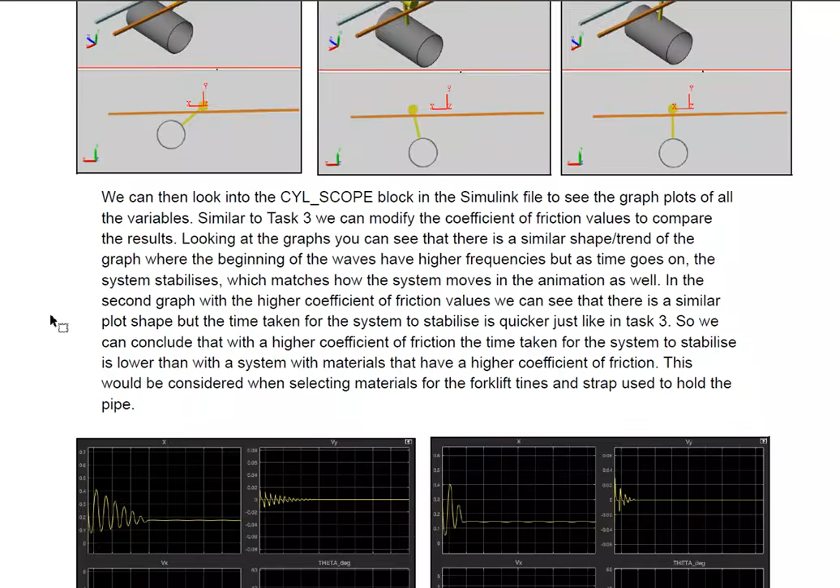So this is a very good one, very rich with information. That's what I actually like to see here. Maybe they only had some issue with changing the parameters for more iterations than required, they just did less than what's required. Okay, so that's it, that's a very good one. Actually that's very rich, Christina did a very good job.

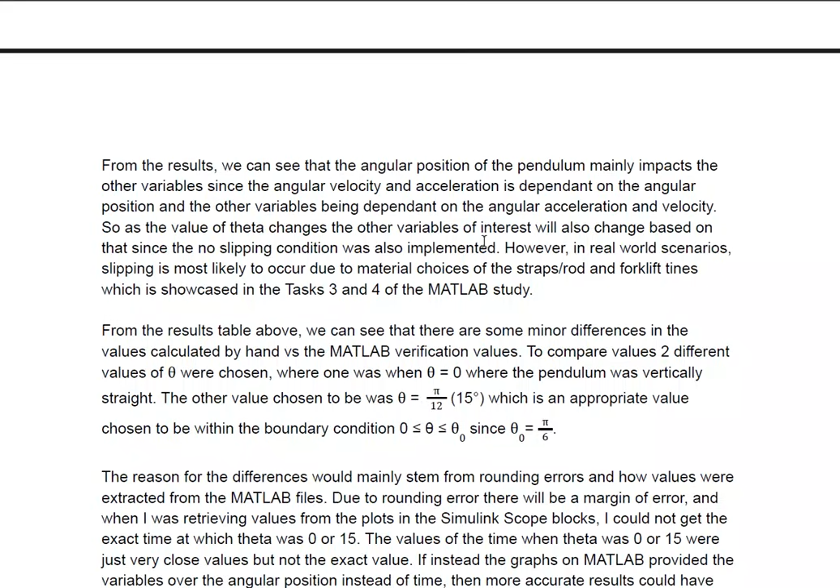That's the results, and the discussion of each should come at the end, which is that one. Okay, just make a discussion about that and done.